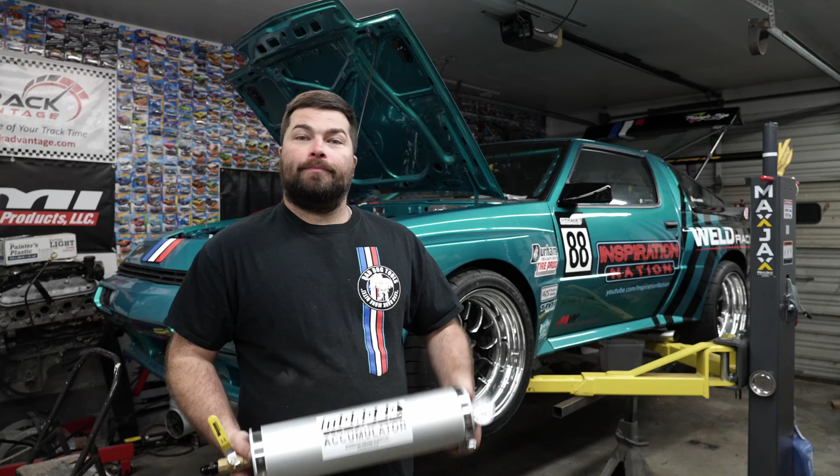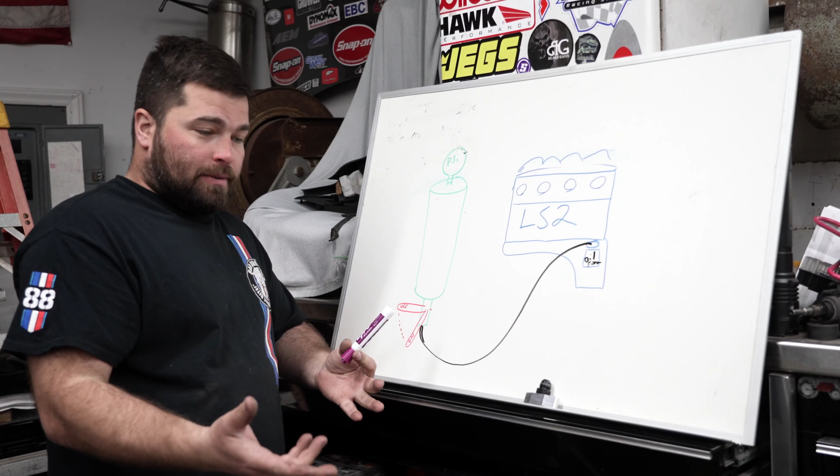On this episode of Inspiration Nation, it is time for us to finally get the Conquest prepped for our track days. And what we're going to be doing is installing this Moroso Accumulator sump. Now, a quick definition of what an accumulator sump is and what it does. For simple, basic terminology, it's a poor man's dry sump.

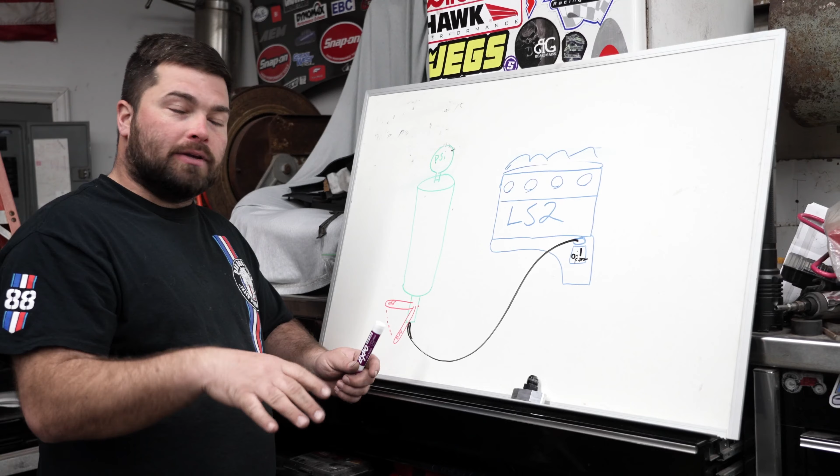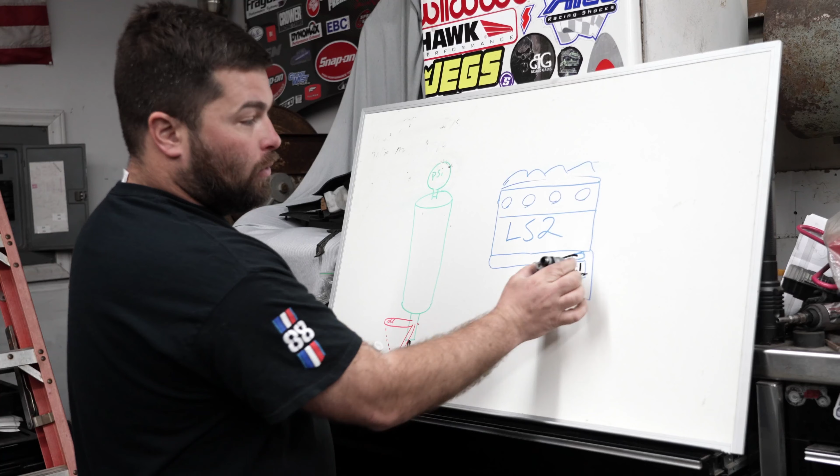When you go around a hard G-force corner and all your oil sloshes to one side of the inside of the crankcase, you can run into oil starvation, which is very bad. Catastrophic failure. Blown engine. We don't want that. So what the AccuSump system does is right above the oil filter on the LS engine, there is a factory spot for the factory oil coolers. And it will bolt right over top of the oil filter on the oil pan, and you'll be able to run a -8 braided line over to our AccuSump system.

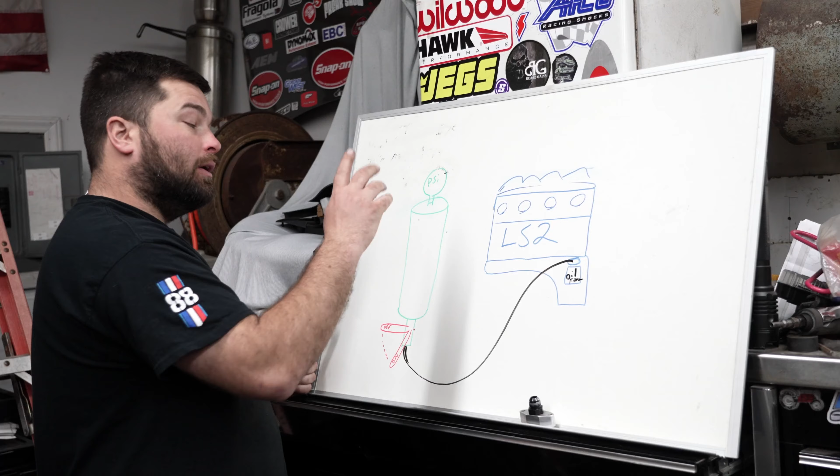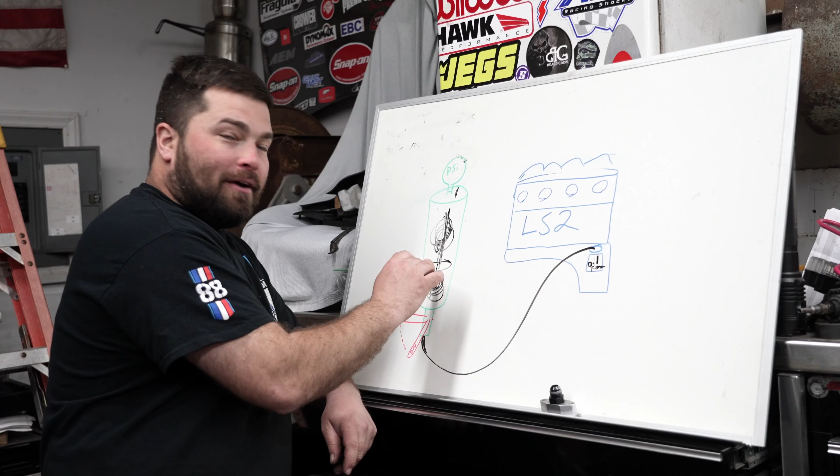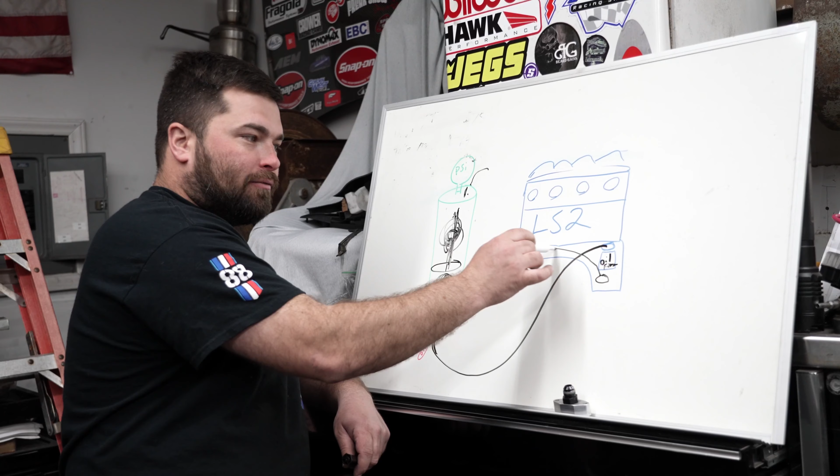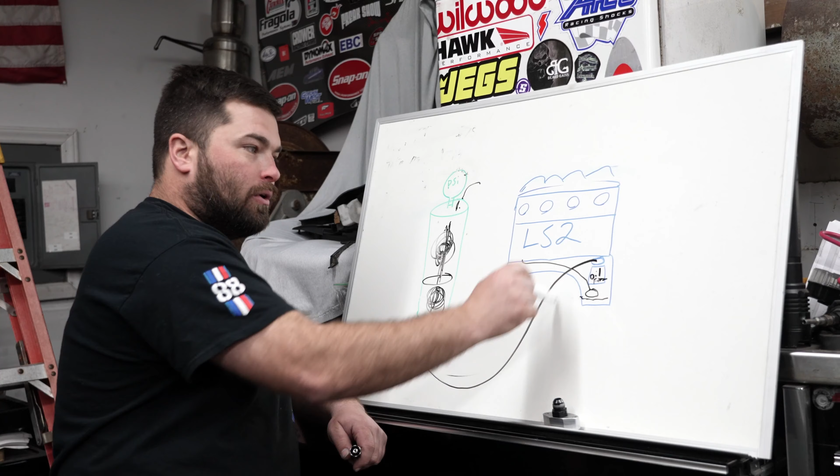Now what happens is, the AccuSump system runs off of the internal oil pump of the engine. So there is a piston inside, which this marker is terrible. So the engine will pump up and keep oil stored in half of the tank. And it is under pressure from the air pressure that you put in this end of the tank. Once the oil ever hits a dry spot from the pickup tube inside the oil pan, let's say all the oil sloshes to one side of the engine casing or what have you, the AccuSump will force this oil into the oil system of the engine, keeping oil pressure through all your main components. That was probably butchered, but you get the idea.

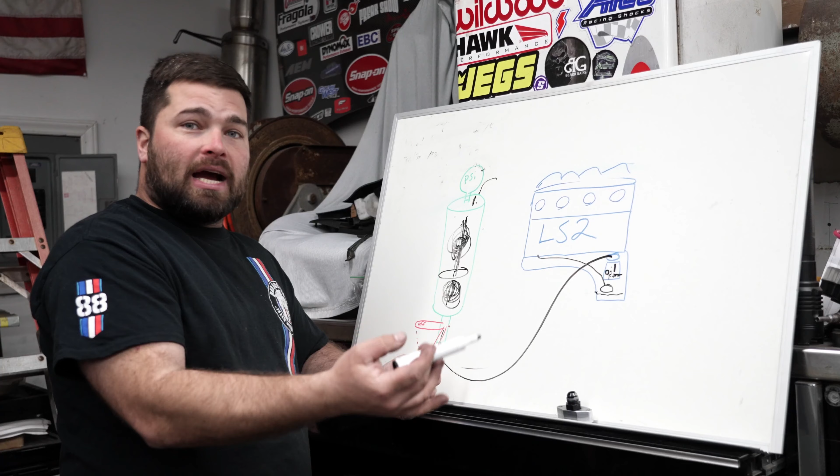I'm just killing this. No, it was great. I understand what it does now. Okay. Do you really? Yeah. Okay. I understand it now.

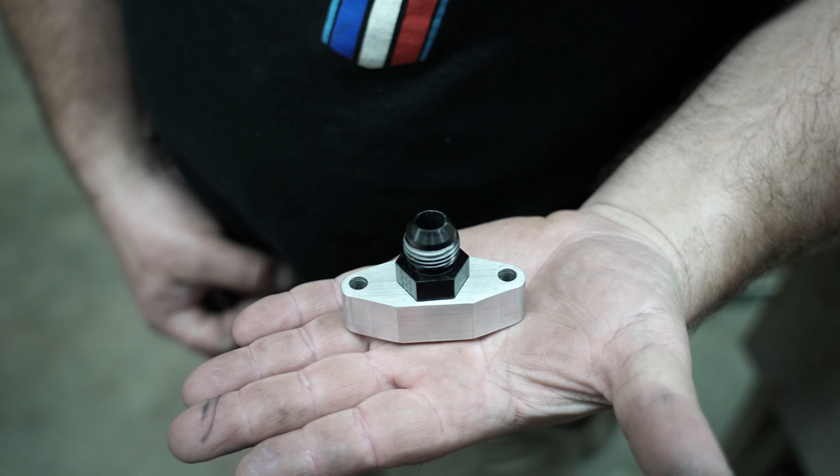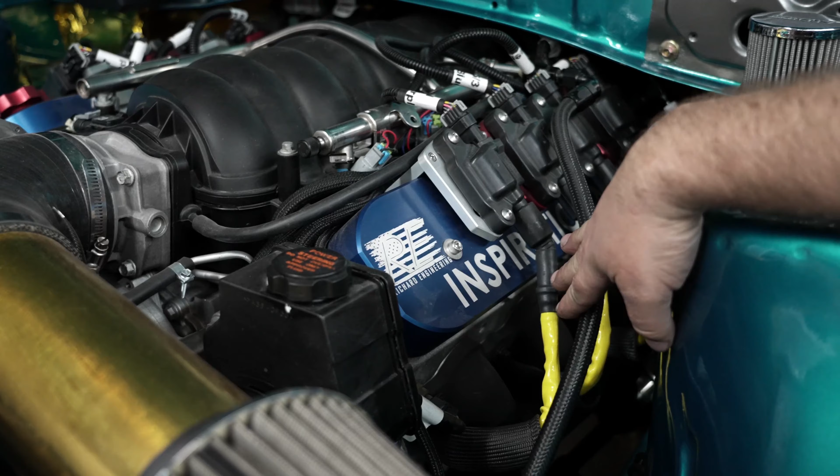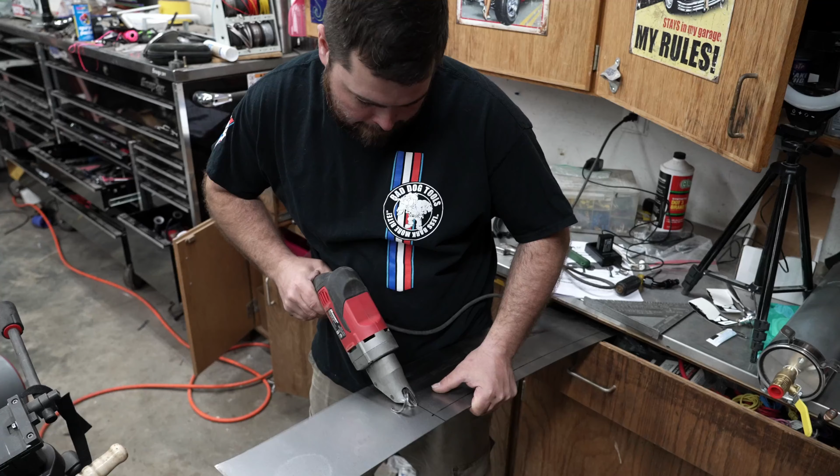So, all right. Big shout out to my homie Mitch over at Richard Engineering for machining out this sweet little adapter for the -8 line. He's also the same guy that made the custom valve covers on the Conquest. And they fit amazingly. Ta-da! Now let's make it pretty.

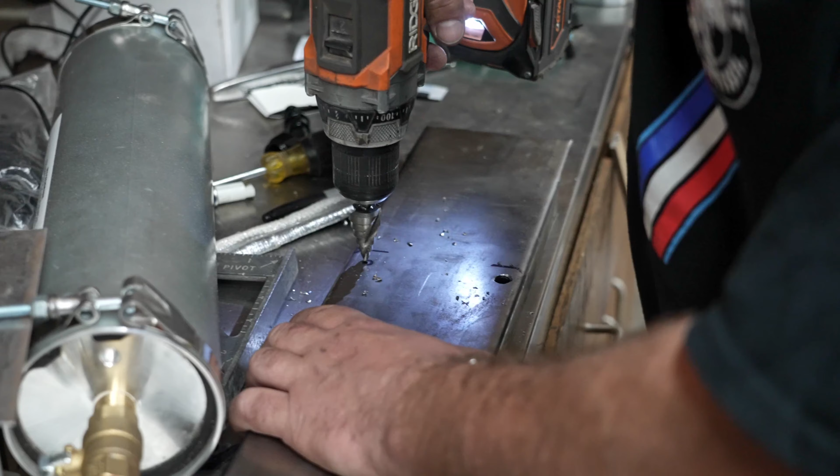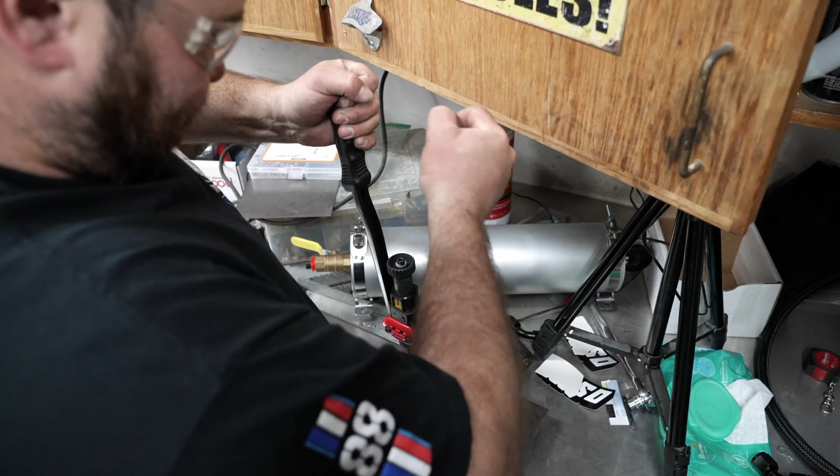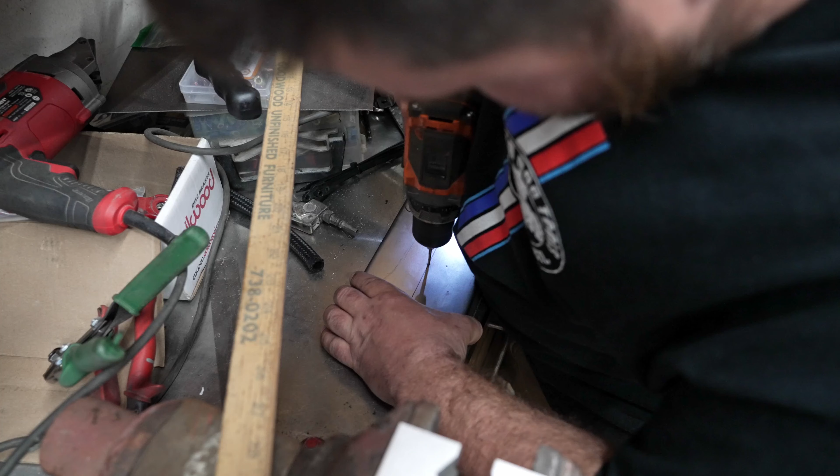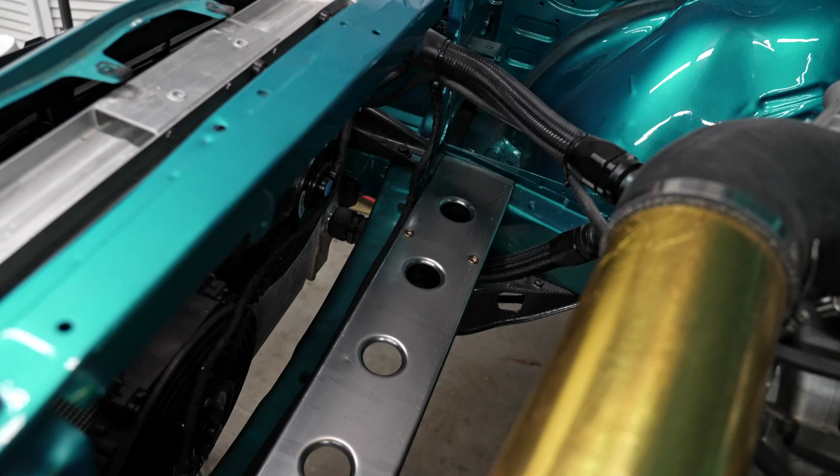Now we got to install our riv nuts. It's all of 3 ounces lighter than it was 10 minutes ago. At least it looks cool. Now we'll just use our off-road Camaro paint rack.

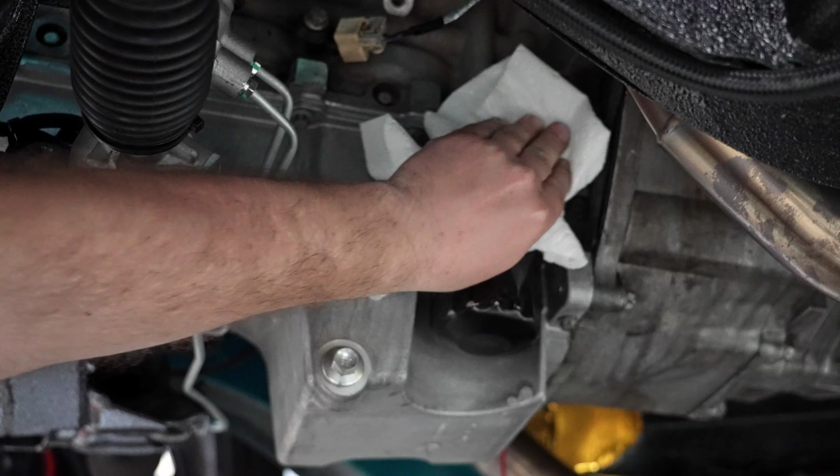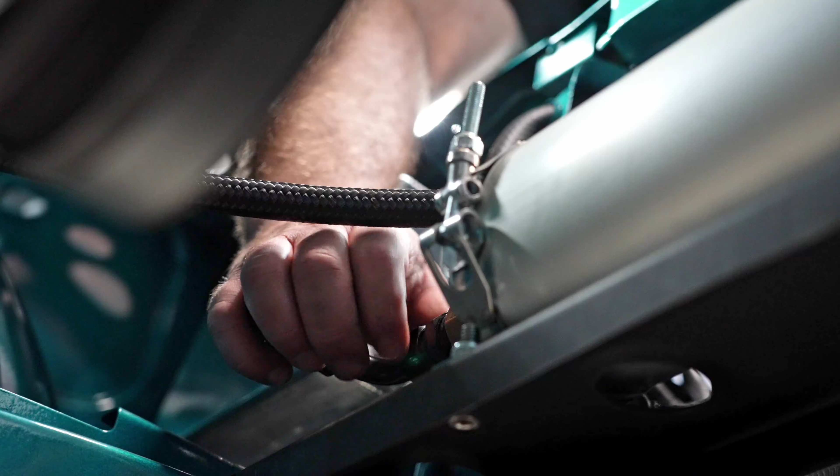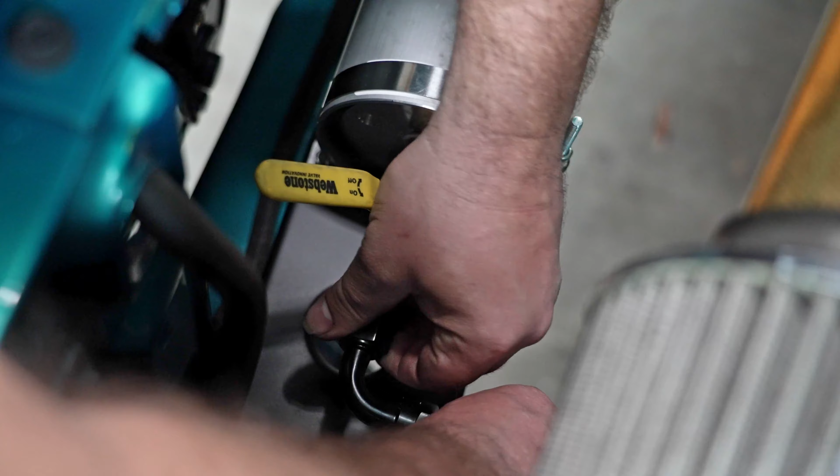We already have our 45, which is going to go onto the fitting under the car. Then we're going to route our line and mark it where we need to cut the end to put the 90 degree for the accumulator sump tank. Now we have our AN line made up, and if you need to know how to make an AN line, refer to our other video on how to make an AN line. But we've got it made. Now it's time to install, and we should be able to wrap it up. Well, this will just help deflect some of the heat because it is a little close to the exhaust.

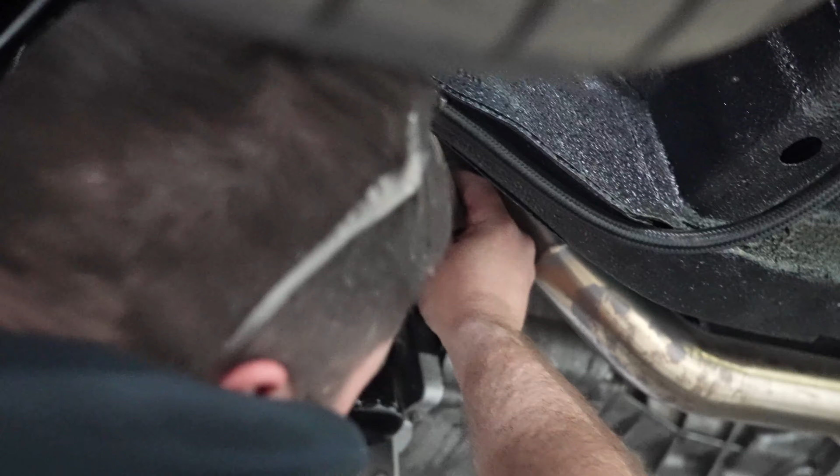All right, now after reading the Moroso directions, after installation, before you do anything crazy, open the manual valve down here on the feed side and come over to the pressure side, unscrew the valve stem cap, and it says pressurize between 60 and 100 psi, and then bleed it back down to 6 psi. I don't know why we overpressure it and then bleed it off, but that's what the directions say from the manufacturer, so that's what we're going to do.

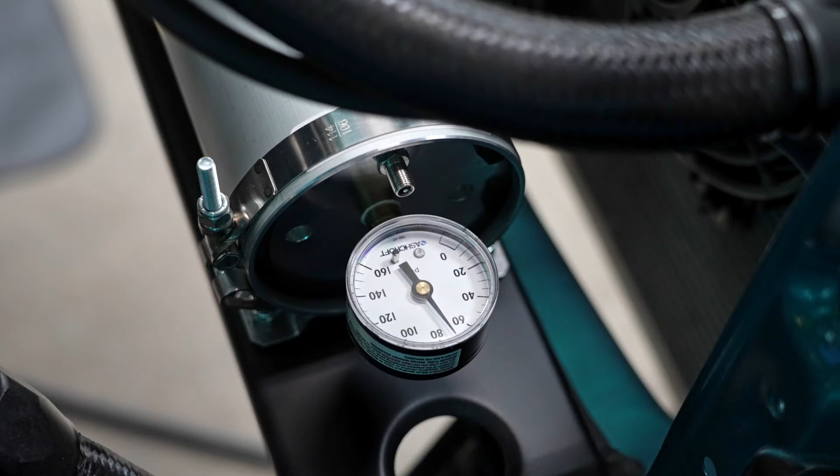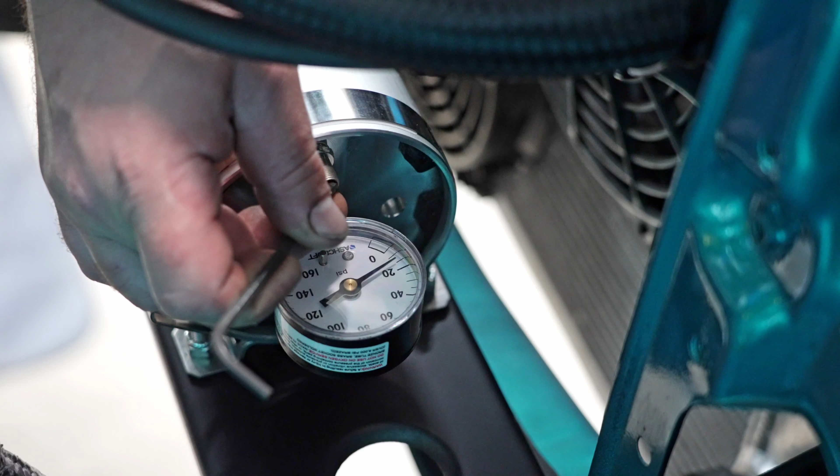Now, before you start the engine up, you need to add an additional 3 quarts if you have this one, which is a 3 quart, and it's, I believe, 2 quarts for the 2 quart one, and so on and so forth. We're running the 3 quart one. The instructions say add 3 quarts, so we're gonna add 3 quarts of oil and start it up.

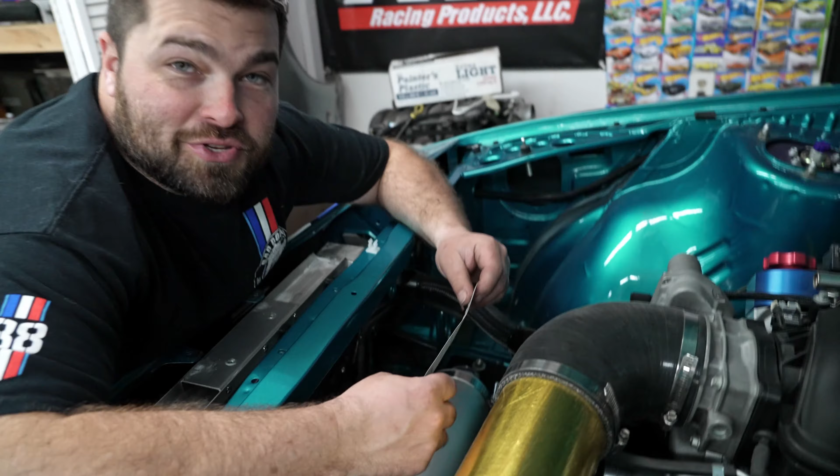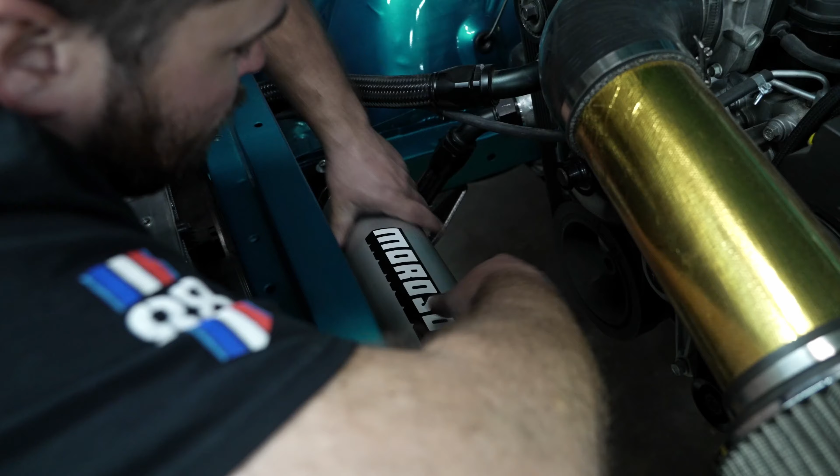Now, for some reason, it bothered me that the Moroso sticker was upside down or facing backwards. And they already sent these really cool ones, so I'm gonna put this one where it's facing the right way. I might even do it crooked just so it bothers me even more. Way better. Oh yeah.

Now before you take it all off your lift or however you have it, do yourself a really good safety tip. Crank it up and check for any leaks, because the last thing you want is an oil leak anywhere on the engine, because if it sprays across something really hot, like the exhaust, you could definitely burn your car down. So make sure you check for leaks and make sure all that is good before you go giving it a rip at the track.